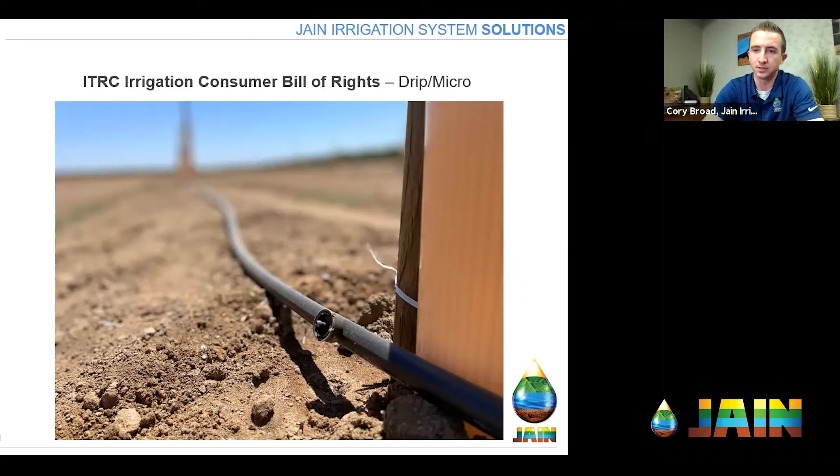And as you mentioned, we've looked at some of this before, and this is kind of the second part of our three-part series on the Irrigation Consumer Bill of Rights. And so without further ado, we'll jump into it and specifically look at the drip and micro irrigation Bill of Rights. I guess I can move through this part fairly quickly as you introduced all that. So I appreciate that. This is from our last presentation as well, but just kind of a roadmap of where we're going.

The ITRC, which is the Irrigation Training and Research Center at Cal Poly, created the Irrigation Bill of Rights to do exactly what you had mentioned, Richard, is help consumers, and not just consumers from a standpoint of getting a product and making sure that it works, but a lot of these, especially on the agricultural side, this is a business. And so we have to make sure that we're getting value and maximizing the value out of that. And so over the years, the ITRC has done a great job of taking the Bill of Rights and updating it, and then also expanding it.

And now we have 3 documents. As I mentioned before, we went through the general. We're going to go through the drip micro specialty document today. And then hopefully here in a couple of weeks, we may have a special guest come in and do one with me as well, and do the soil and plant moisture monitoring systems. So again, very specialized into what are you purchasing. So it's not just a blanket document. They've really drilled down on some of the details.

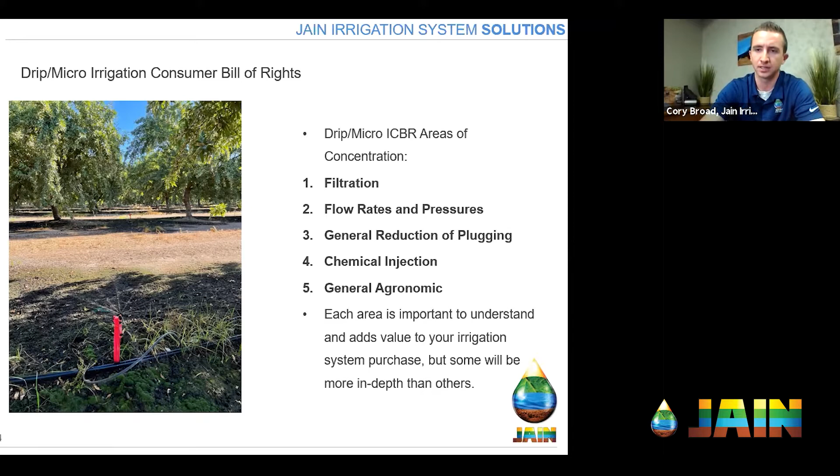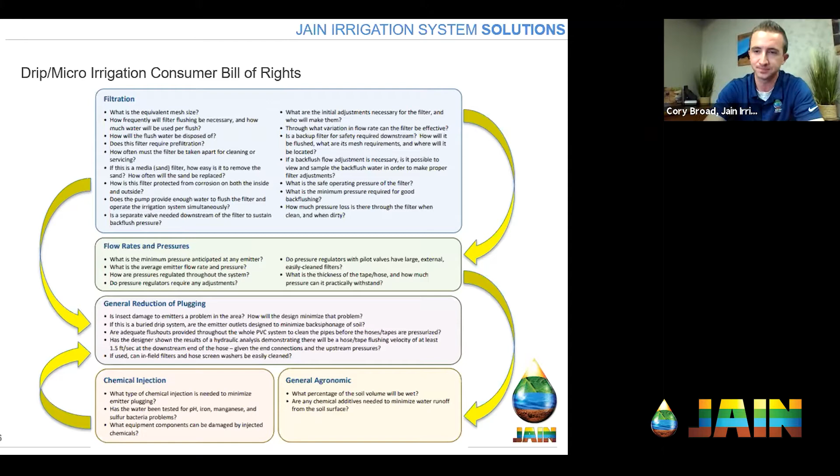So when I say that they're all really important, I really believe that, even though general agronomics technically only has 2 bullet points and filtration might have 20, they're all intertwined. This whole thing is an irrigation system. And so I think it's really important to understand that systems all work together. Yeah, that's a really good point, right? Each one relying on the other. So you can't have one more important than the other because they're all relying on each other. That's a great point, Cory. Thank you. Links in a chain.

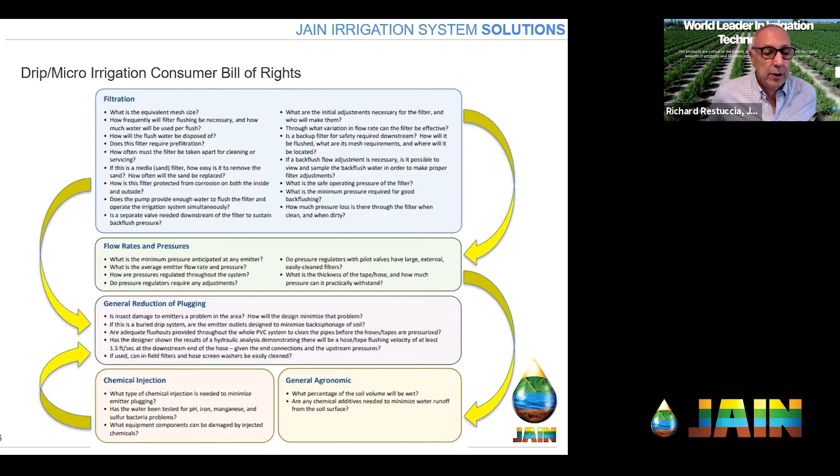So jumping into filtration, I took some of the bullet points. We won't go through every single one of them, but we'll go through quite a few. One of the first things that comes up is, what is the equivalent mesh size of your filtration unit? So if you're using a screen filter like our Steel Spin Clean, this information is readily available and pretty easy to understand when ordering the product, either as the consumer or the irrigation dealer. We have screens that are 30, 50, 100, 150, 200 mesh. We do custom meshes as well. So there's a lot of options there, but it's pretty straightforward. It's even stamped on the side of the filter, so it's easy to identify.

When you get into sand media, it's a little bit different because you have the tank area in and of itself, but then you have the media that does the actual filtration inside. So what type of media is it? And what mesh size effective is that? And so I just did some of the basic setups that we do here in the Valley with the different crushed silicas, and then roughly what those numbers translate to. So sometimes on a bid, you might see as a consumer, number 16 sand or silica. Well, now you know that that's 200 to 150 mesh, depending on the quality of it. And so it gives you a baseline of what you need to do. If you're buying drip tape, you might need 200 mesh.

So that might be something you can look at and say, hey, wait a sec, why don't I have number 20 silica in here to provide that extra layer of protection? And so with the media stuff, you just need to be aware of some of those small nuances, because you can change the filtration capacity of it just based on what you're putting inside of it.

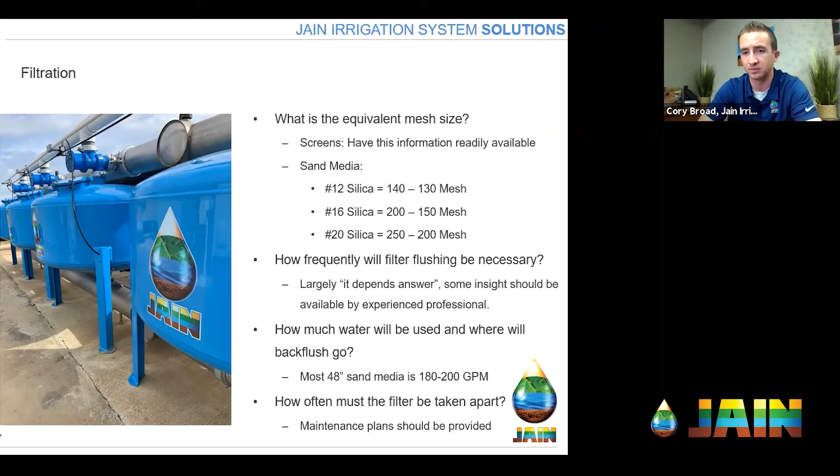So again, if you don't know or you're not educated or these conversations today aren't happening, you just won't know. And so it's just an opportunity again, why we're here today, to be able to educate people on saying, hey, let's ask these questions. Let's talk this out now, because it's a 20 to 25 year investment. Yeah. Okay. Well, that's a good guide.

Thank you. So one of the things that gets overlooked a lot too is, does the pump provide enough water to flush the filter and operate the irrigation system at the same time? And so again, we talked about that 200 gallon a minute, just say, maybe even down to 180. But if you have an 800 gallon a minute irrigation system running, and then the filters go into backflush, you've now added 25% demand to that system.

And so if the pump is not set up to handle that, you're going to see low flow in the field, and you're going to see a pressure drop, because that water is now going out through one of those tanks during the backflush cycle. And it's going to happen to the next tank and the next tank until that flush cycle is complete.

And if you have excessive flushing, you can actually be really disrupting your distribution uniformity as well. And then your application efficiency of your irrigation, because you're putting 25% of the water for a certain period of time not even on your field. And so it's really important to manage and understand that, and then also make sure your pump can handle it.

And then another thing that kind of bleeds into this a little bit is the pressure sustaining valve. So is a separate valve needed downstream of the filters to sustain backflush pressure? Now that doesn't necessarily stop the issues in the field from a lack of water standpoint, because a sustaining valve will close down and limit some of the water going out to the field to ensure that there's enough pressure and flow going through those tanks during backflush.

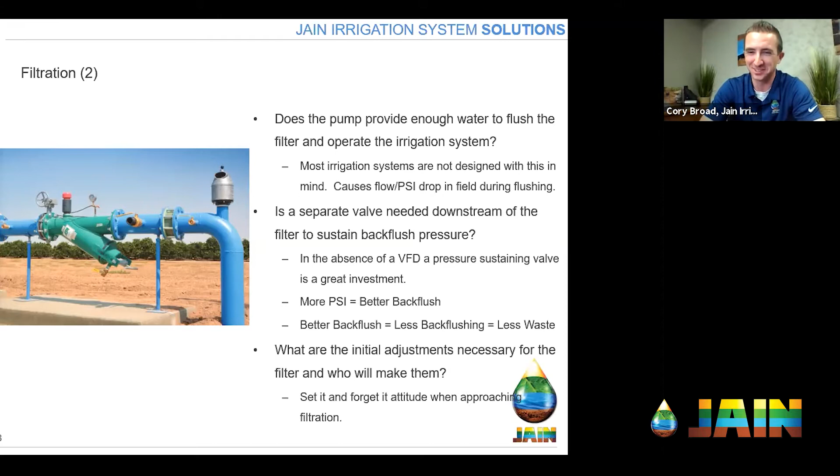Absolutely. I'm glad I did it. I've done a few maintenance presentations as well. So if anybody needs maintenance tips, please look those up.

Yeah. So going into the next section, flow rates and pressures, I think it's a fair question to say, what is the minimum pressure anticipated at any given emitter? To put it into context, most pressure compensating drip emitters require about 10 PSI to operate. Many work below that as well. Our top drip and amnon emitters both operate below 10 PSI. So I think it's really fair to say, hey, what's the minimum amount that I need? But also, given this area or constraint, what pressure should I be seeing in this area?

Because then if you're performing that maintenance, it gives you an idea or a checklist to be able to say, oh, wow, I am being effective at that. I'm maintaining what the system requires or what we would expect. And then to couple with that, what is the average emitter flow rate and pressure? That's going to be really helpful in your non-pressure compensating applications, and it's also really the foundation for some of your baseline and irrigation scheduling.

For instance, if you have a micro sprinkler system, an orange jet at 20 PSI is 8.4 gallons per hour. Well, just say you have maybe a little bit of an excessive hose loss, and by the end of that line, you have 15 pounds. Well, now your flow rate's 7.3. So what's the average emitter flow rate in there? And that's also going to impact your uniformity. So again, it's just a spot check to say, hey, what should I be getting and what should I be looking for? Because then that might trigger you to say, wow, I need to do more maintenance because I'm seeing this change.

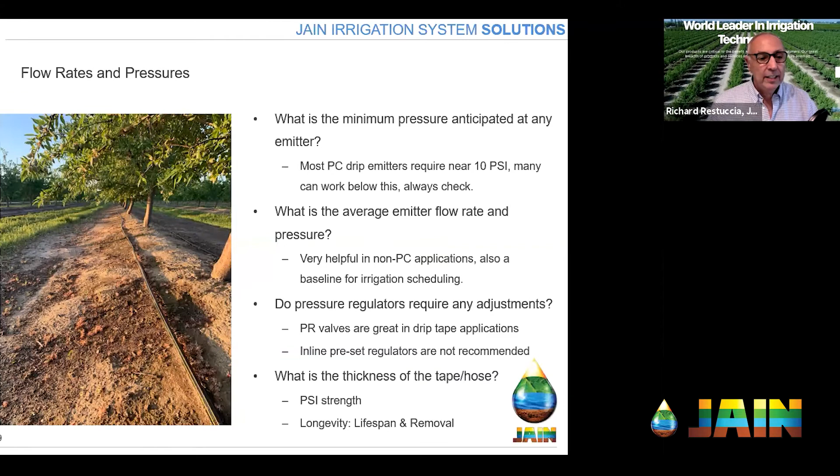So going into general reduction of plugging, if it's a buried drip system, are the emitter outlets designed to minimize back siphonage? For us, on our top drip and Amnon products, we have AS technology, which is anti-siphon, which means it won't pull water and debris back into the outlet of the emitter. It is available on the market today. It's something that people should look into, especially as they start looking at more opportunities for subsurface drip irrigation in almonds.

And then you can see a picture on the left-hand side. That's me flushing a field, maintenance. And one of the things that's important is, are there adequate flush outs throughout the entire PVC part of your irrigation system to clean the pipes before you even put water in your hoses and or your drip tape? And the way I really look at this is, enough flush outs that are easy to do is going to create a better overall maintenance program.

You mentioned it earlier, Richard, you don't like doing it, but if I make it easier for you, or if you're a grower and you have your employees, the easier it is to do, the more likely everybody is going to be to follow along with those and get that done.

And then something I also see that happens quite a bit is, are the flush outs big enough? Jetting of water is essentially turning your hose on all the way, and then when you put your finger over the end of it and it sprays out, you basically push the water farther, but you're limiting the flow rate of the water that's coming out. The same concept happens when you have, say, a 6-inch pipe with a 1-inch ball valve flush out. You're just kind of jetting the water, and you're not getting all of the water flow through it, which is what's carrying the debris that you're flushing out anyways.

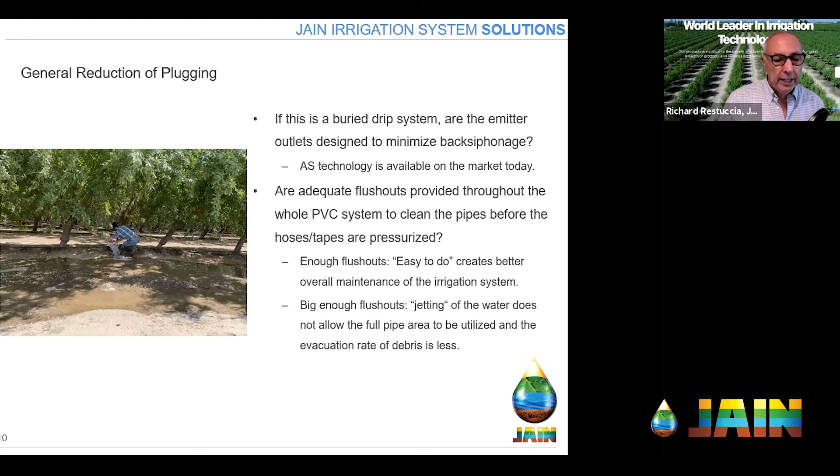Yes, sir. Kind of staying with that same theme, has the designer shown the results of a hydraulic analysis demonstrating there will be a hose or tape flushing velocity of at least 1.5 feet per second? That's a lot, I understand. Really, it's about being able to understand, at the end of a hose or a piece of drip tape, so in this case a lateral, is there going to be the ability to get 1.5 feet per second velocity of that water when you open up the end of it.

1.5 feet per second is the minimum that we like to see when flushing an irrigation system to remove most debris. In other cases, even 2 feet per second may be required, depending on the weight of your material and how much of it is in the irrigation lateral itself.

Many irrigation systems I see don't take this into consideration, especially with drip tape, because the size of it around here is 7/8 inch inside diameter, and we're going a 1/4 mile run. So it's roughly 1,320 feet. It's a long ways with a decent sized pipe, essentially. You need a lot of velocity and pressure to get through there. And so, for example, if you use an 18mm hose, 1/2 gallon, 36 inch on an 1/8 mile, which is a very standard run, you're going to need 32 PSI at the riser in order to achieve 1.5 feet per second at the end.

And so making sure that the system is zoned appropriately to make that easy, but also is capable of handling it. People size the system for irrigation operation, not for irrigation maintenance and flushing. And so there's a unique characteristic difference, and we'll get into that a little bit more later on.

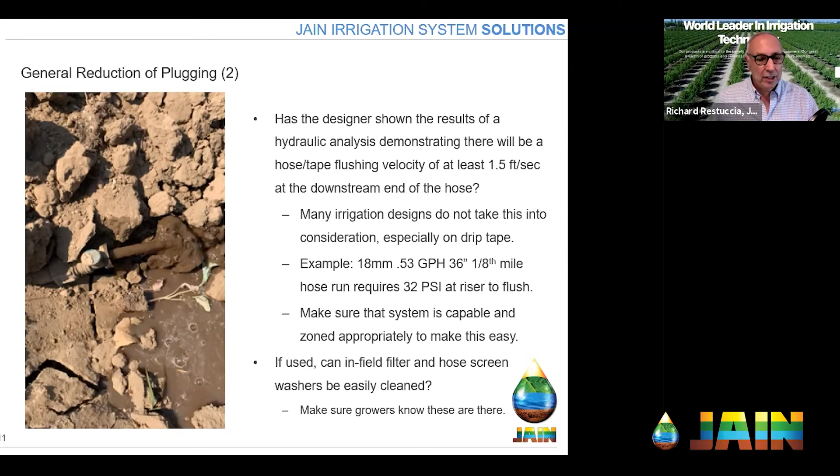But this is what they would do: they would open up the end of the line, and that's as far out as the water would come. Because they're flushing during an irrigation operation, not in a maintenance-specific operation. And so they weren't getting that extra pressure. Thus, they weren't getting that velocity at the end of the line. Therefore, this is just contaminants sitting at the end of the line coming out. You're not really pulling any of the material out. So yes, it is for shock, but I do see it far too often. Yeah, well, it makes a great point. It almost looks like chocolate milk coming out of the line. Absolutely.

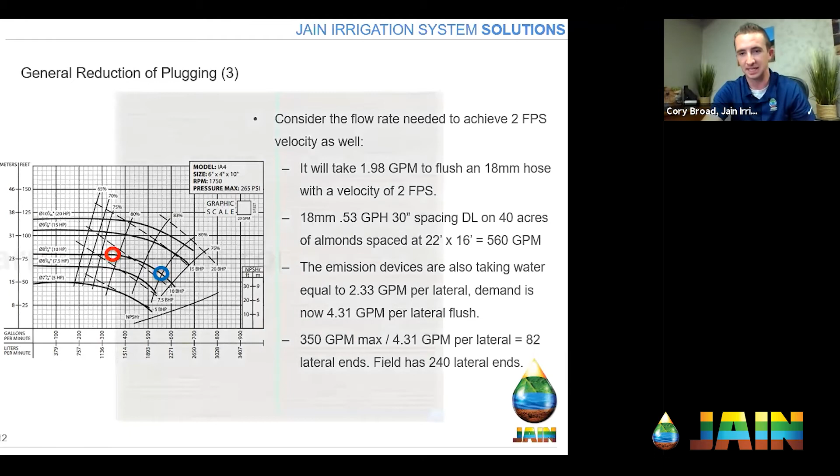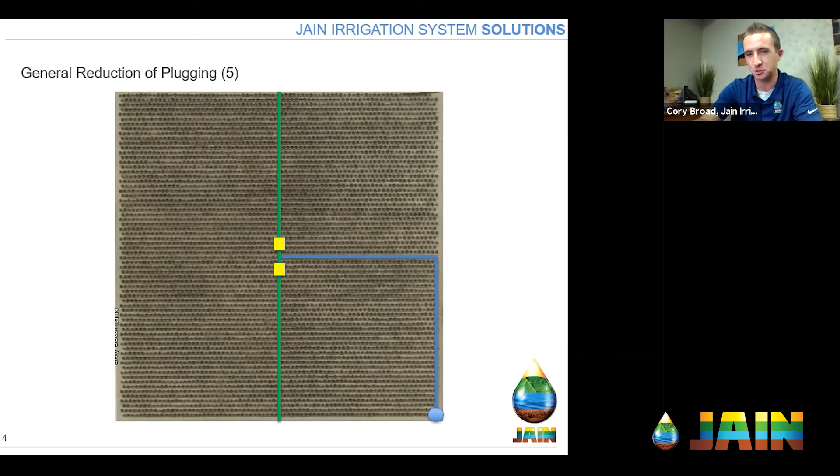So again, just a real life example of a simple investment up front and a simple conversation with the end user. Make it easy to do and they'll do it, but also explain, here's the value proposition. Your cost of labor versus the cost of this extra pipe and maybe 2 valves. Here's what you're going to get for the next 25 years.

Yeah, thank you for showing us that solution, Cory, because I was just imagining myself running around this field, opening some valves, closing a bunch more in 100-degree heat. I'm probably going to skip it today, right? I'll catch it when it's cooler in a few weeks, but providing this solution makes it a lot easier and much more likely to stay on my maintenance schedule then.

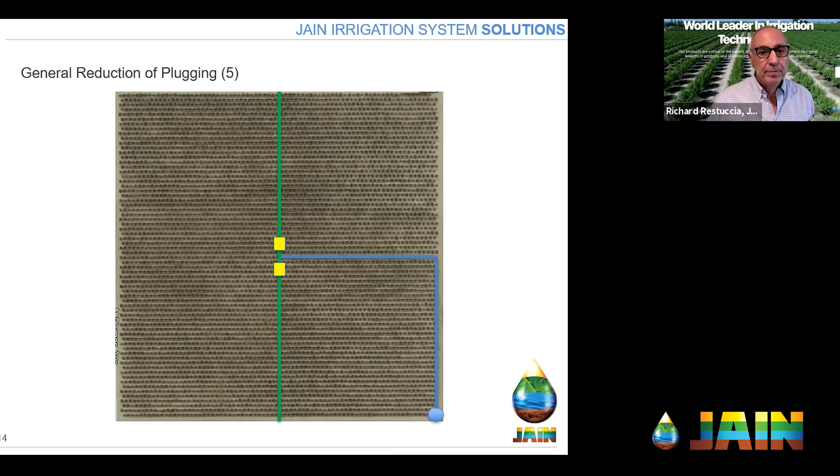Absolutely. So getting into chemical injection is going to be needed in some cases to minimize emitter plugging. I think understanding that and bringing that up front to growers is important. I kind of look at it in 2 different ways. Constant injection, which is generally going to be used for like pH control, getting bicarbonates out of the water, lowering the pH, so on and so forth. And then obviously there's a maintenance style, which is kind of that slug in the material and then let it flush. Obviously, we want to see the fertilizer applications and more of the constant injection side of things.

But there needs to be an understanding: can the injection system handle something where maybe we do have some plugging that's gone on in the field, and we need to put in a decent amount of material in a short period of time, and then be able to flush that out appropriately? So just understanding and making that clear to the consumer, I think, is important.

And then, has the water been tested for its pH, iron, manganese, sulfur bacteria? These things all exist across the US in a number of different scenarios. Certain places have different water quality issues. I think many companies can do that for you outside of just your irrigation dealer. But I do think dealers should offer to take water samples, hopefully partner or have a relationship with the local lab if they don't have something internal that they can offer as well. And so I think just a heads up on that is really important.

And then one thing that does get missed quite a bit too is what equipment components can be damaged by injected chemicals. So you can see on the left-hand side, that was actually a barb to a sprinkler at one point. There's not much left at the current state. And so when you think about sprinklers themselves, the barbs, the swivels on fittings, ball valves, those are all made of different types of compounds versus your supply tubing or your PVC. And so understanding what those components are made of and what affects them is something that I believe dealers should bring up, and then also make sure they specify the right products.

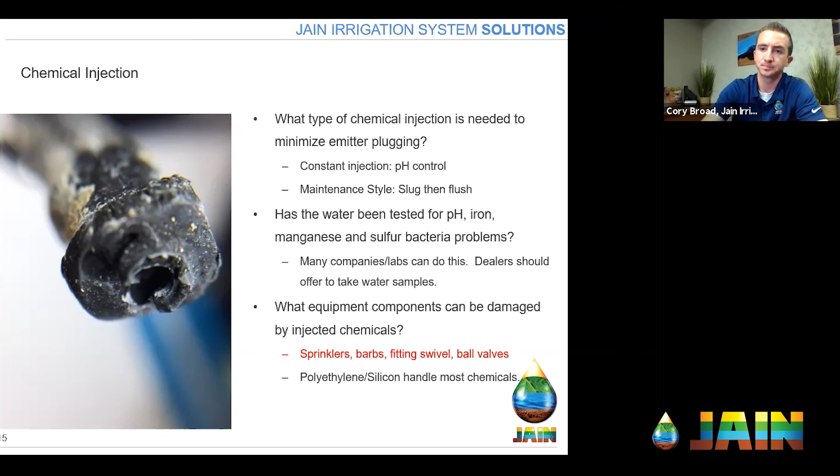Yes, sir. So getting into the last piece of today, the general agronomic, there's really only 2 things on the ICBR about this, but one that's really important overall is what percentage of the soil volume will be wetted. That's going to influence your soil water holding capacity. It's going to be obviously really important for irrigation scheduling, because you're talking about how much water per foot of soil, but also the depth and the width of that, right? That's going to give you the volume.

And so like an example, drip versus micro sprinkler. And again, it varies on flow rates and soil types, but maybe drip is 20% of the soil wetted area versus a sprinkler is 40%. And the picture on the left-hand side is our 2002 sprinkler, which is pressure compensating, on a 22 by 16 foot almond block. And this has our extra long range swivel. And you can see that's certainly a lot more than 40% of the area being wetted. And so just understanding that as a consumer is really important because it's going to affect your irrigation scheduling for the next 20 to 25 years.

And then are there any chemical additives needed to minimize runoff? One of the things that comes up a lot in agriculture, and has been used in the past on the coast especially, is polyacrylamide, PAM. It gets used in the construction business as well, historically, to basically limit runoff contaminants into sewers and things like that. And basically, it just flocculates liquids in soils and reduces that runoff and pull of soil.

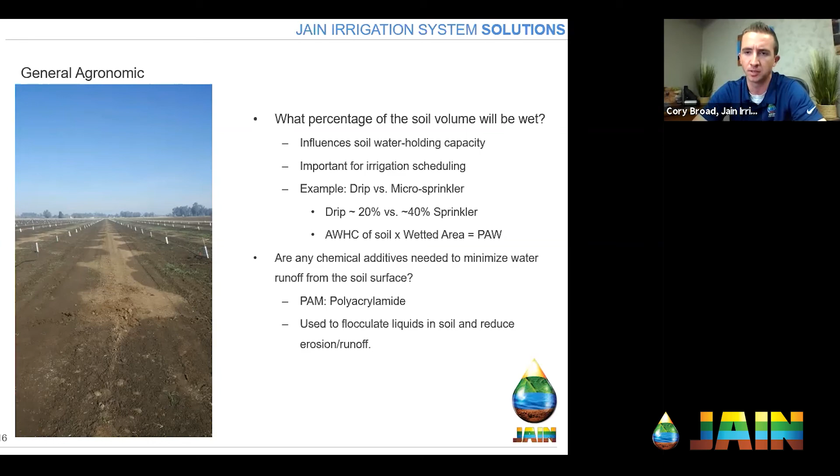So in summary, again, all the points are really valuable. I hit almost all of them. And I know we've gone through a lot today. But again, this is meant to create good discourse between the consumer and the dealer and make sure that everybody understands what the expectations are and how we're going to meet them.

So if I had to go through and just do a summary for you and give you a takeaway, starting with filtration, does it meet the product need? I talked about drip tape earlier. Some drip tape needs 200 mesh. Other thin wall emitter line needs 120. Most double line drip is 120 to 150 mesh. Most sprinklers are 100 mesh. So understanding what the product application is, we need to make sure that the filtration is meeting that.

But also, does it meet your operational needs? If it's something that you have to go through and flush manually all the time, maybe that's not for Richard. Maybe it's something with an automatic type system that's designed well and is a little bit less maintenance intensive. So just kind of understand what the operational needs are there.

Pressure, how's it managed in the system? Are there a lot of valves? Are the valves something that take care of themselves for the most part? Is it something that you need to go out and manually adjust a gate valve to continue to operate? And then also, what's the minimum needed for the product or the application that you're running?

Because again, that's a baseline. If Richard goes out and he says, oh, I don't have the minimum that I need to operate this emission device, now something's wrong, then maybe it's maintenance. Maybe it's something bigger than that. But you have to understand what that is. And I get asked that question a lot.

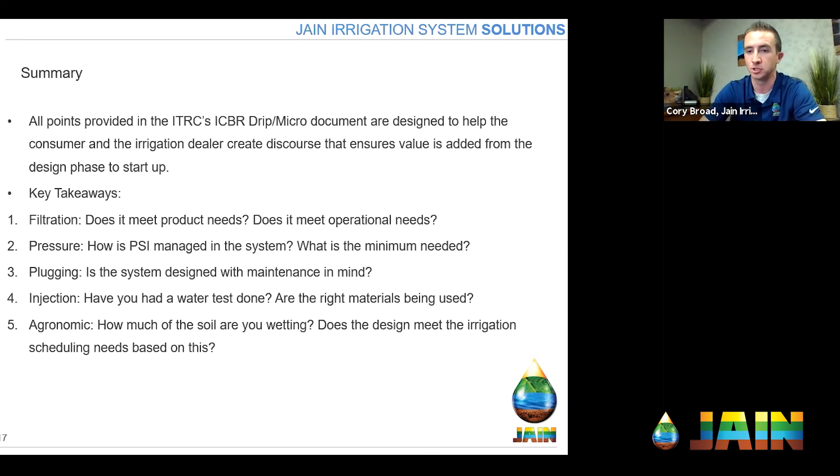I think it's great discourse, and it's meant to be a two-way street. It's not meant to be something that consumers can grill the dealers on. It's meant so that the dealers, to your point, can say, hey, this is why we do what we do, and this is why I'm charging you what I'm charging you to deliver the most value. Yeah, no, that's great, Cory.